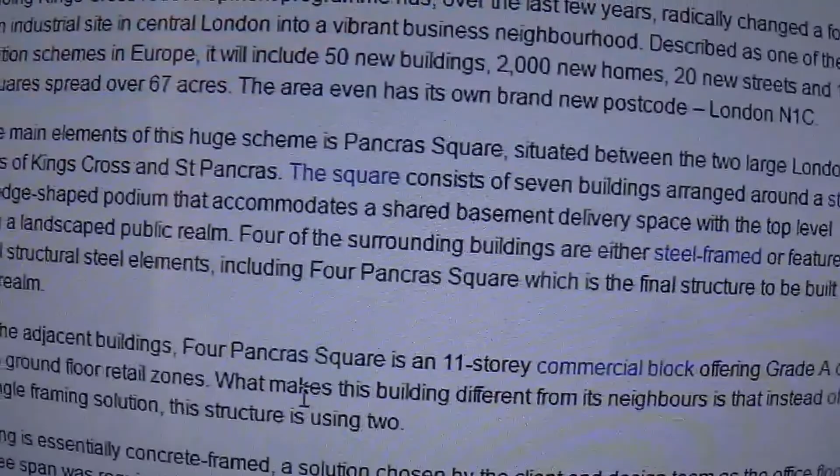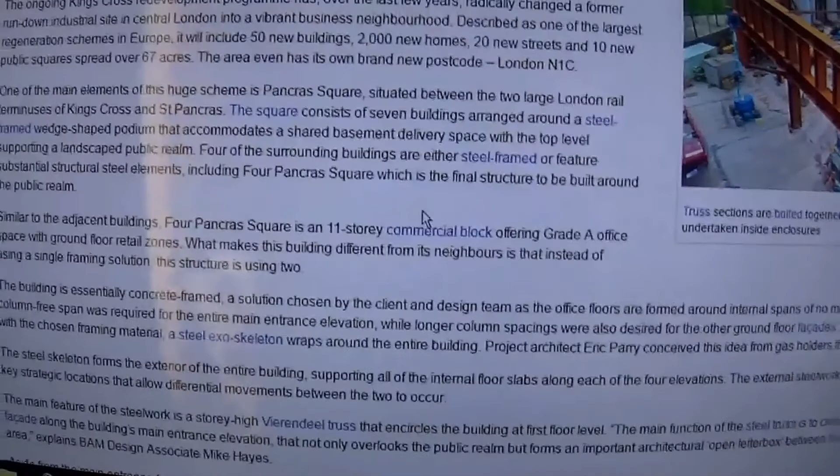It's called weathering steel. And as I suspected, although I think it is still load bearing, it is a load bearing structure, it talks about it being an exoskeleton, which I found really fascinating. Basically it's a special type of steel that's actually designed to have that appearance, that rusty appearance, because they were trying to keep in keeping with... I'm not going to read the whole thing through, it's going to take forever, blah blah blah.

It's really fascinating, really interesting, and I found it so. Some people might think this is so super boring, but I'm sorry folks, I just find this really fascinating. I love learning stuff.

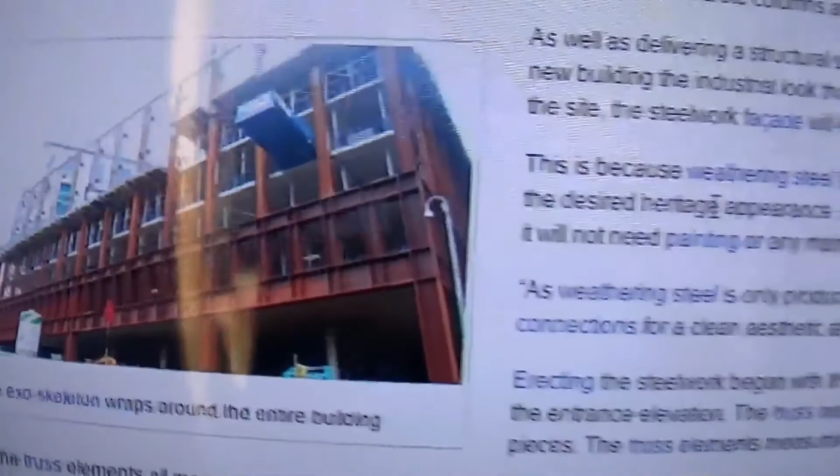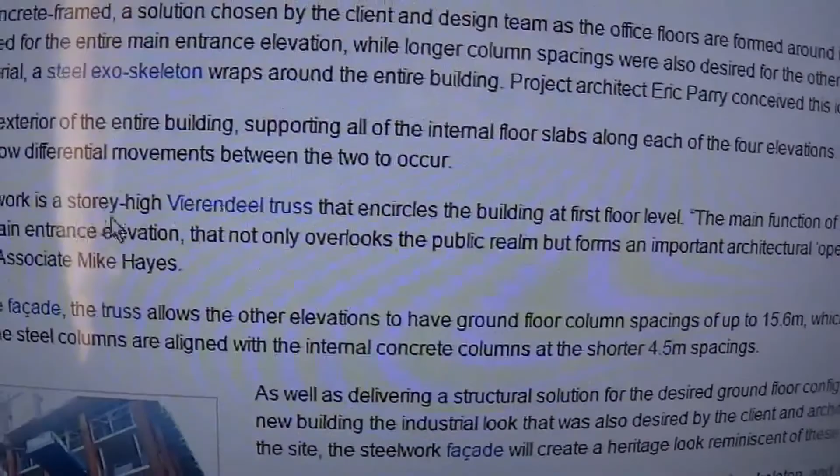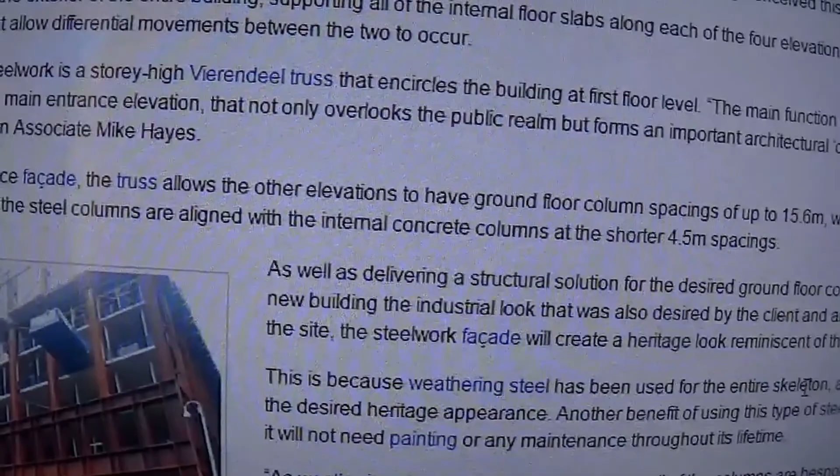Apparently what happens is it's a special type of steel made with certain... hang on, wait, let me find it properly so I'm not talking through my bum. Right, the four surrounding steel buildings are either steel... hang on, let me get to the bit. Right, the main feature of the steelwork is a story-high... what, I can't pronounce that... something truss. Right, hang on, where is it?

As well as delivering a structural solution for the desired ground floor configuration, the steelwork exoskeleton will also give the new building the industrial look also desired by the client and architect. As Victorian era gas holders formerly occupied the site, the steel facade will create a heritage look reminiscent of these times.

This is because weathering steel has been used for the entire skeleton, and its hue will subtly change over time, lending itself to the desired heritage appearance.

Another benefit of using this type of steel is that even though it will remain exposed, it will not need painting or any maintenance throughout its lifetime. As weathering steel is produced in plate, all of the columns are bespoke fabricated sections with hidden internal connections for a clean aesthetic appearance.

I'm trying to find the bit where it explains what kind of steel it actually is. I can't remember, that's probably in the other bit I read. Right, hang on, wait, sorry. Oh man, right, let me... I'll tell you what, we'll just click on that, it's easier, isn't it, and it'll just tell me.

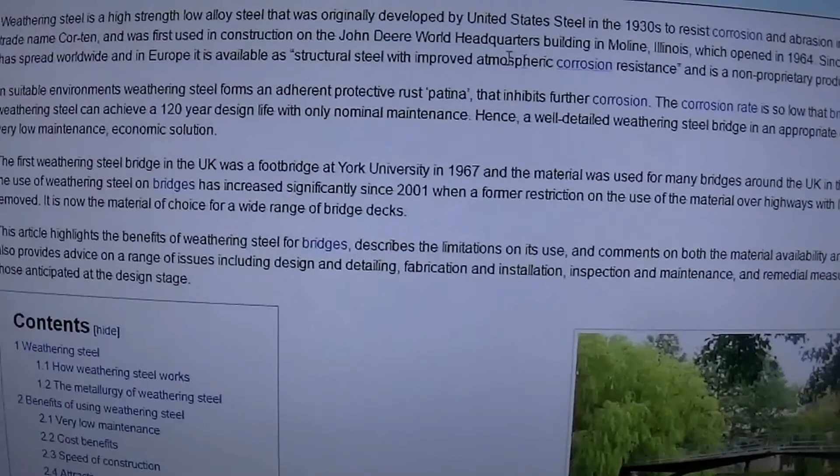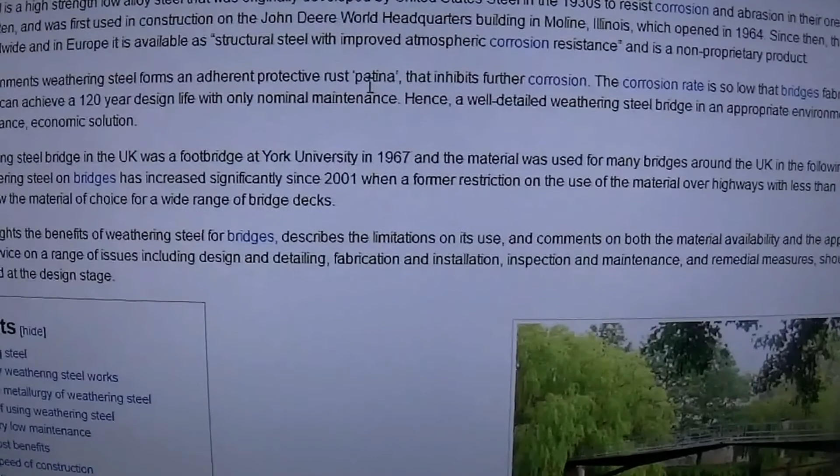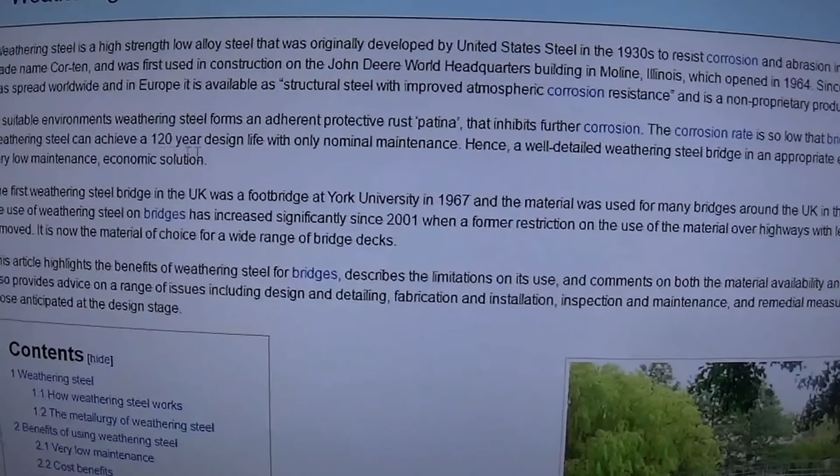In suitable environments, weathering steel forms an adherent protective rust that inhibits further corrosion. The corrosion rate is so low that bridges fabricated from unpainted weathering steel can achieve a 120-year design life with only nominal maintenance. Hence, a well-detailed weathering steel bridge in an appropriate environment provides an attractive, very low maintenance economic solution.

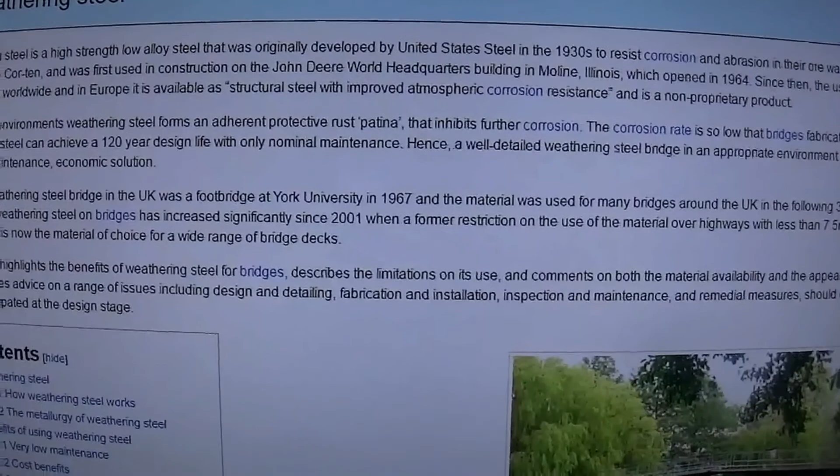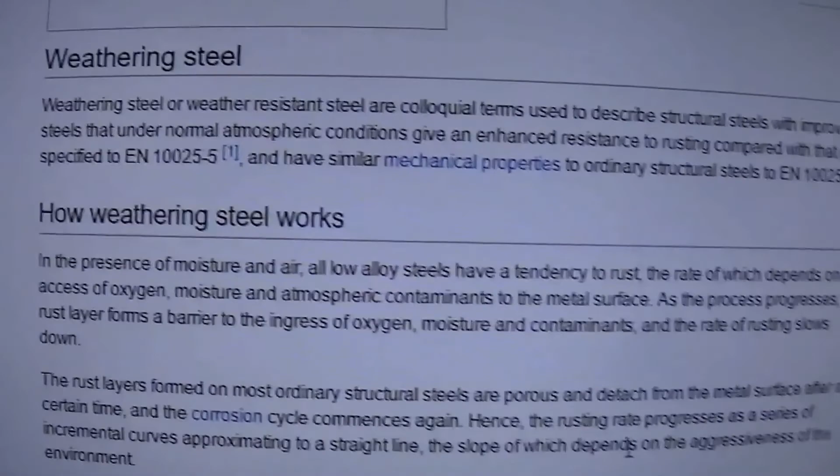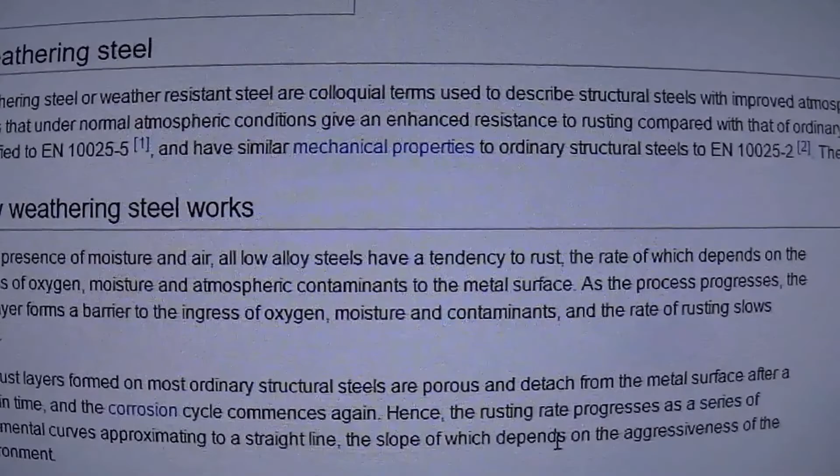So basically, now let me try to find the actual how weathering steel works. In the presence of moisture and air, all low alloy steels have a tendency to rust, the rate of which depends on the access of oxygen, moisture and atmospheric contaminants to the metal surface. As the process progresses, the rust layer forms a barrier to the ingress of oxygen, moisture and contaminants, and the rate of rusting slows down.

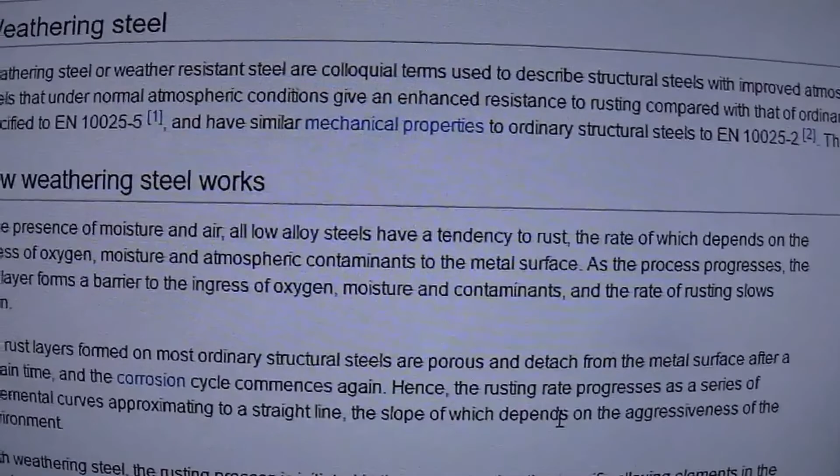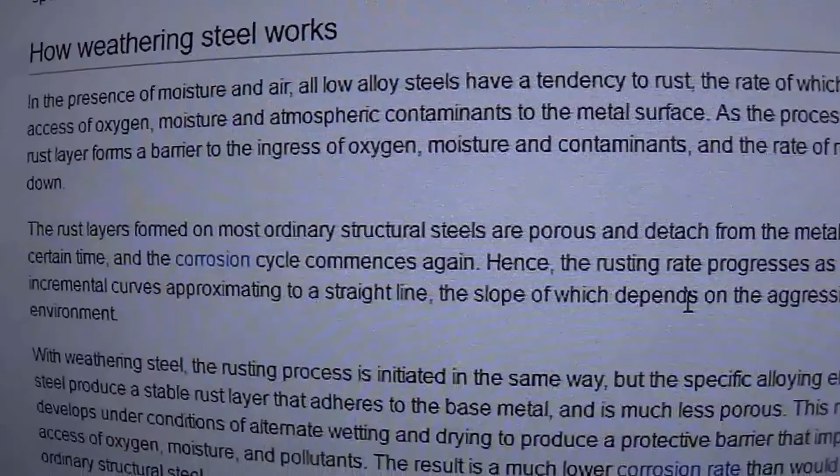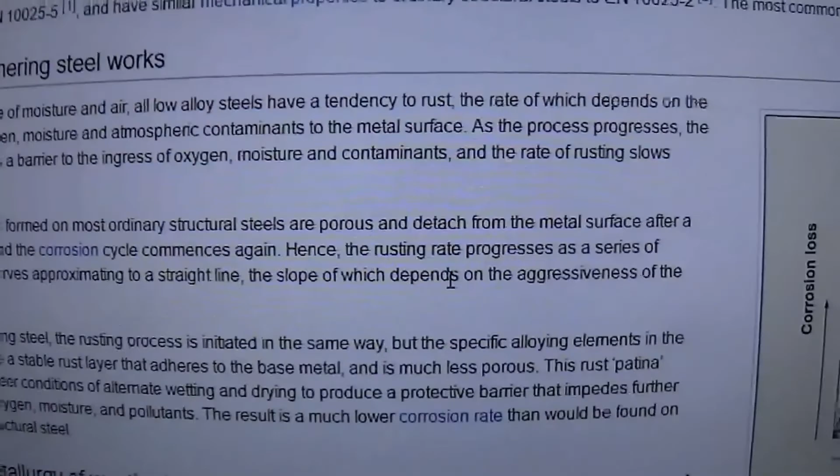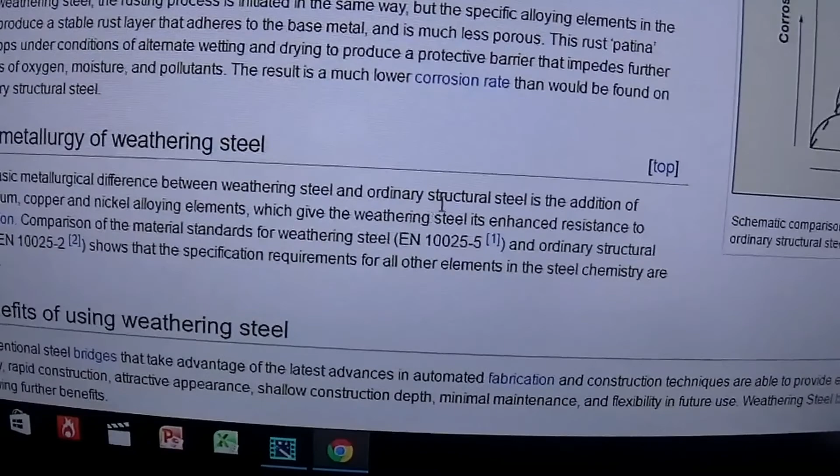The rust layers formed on most ordinary steel structures are porous and detached from the metal surface after a certain time, and the corrosion cycle commences again. Hence the rusting rate progresses as a series of incremental curves. So basically, the basic metallurgical difference between weathering steel and ordinary structural steel is the addition of chromium, copper and nickel alloying elements, which give the weathering steel an enhanced resistance to corrosion.

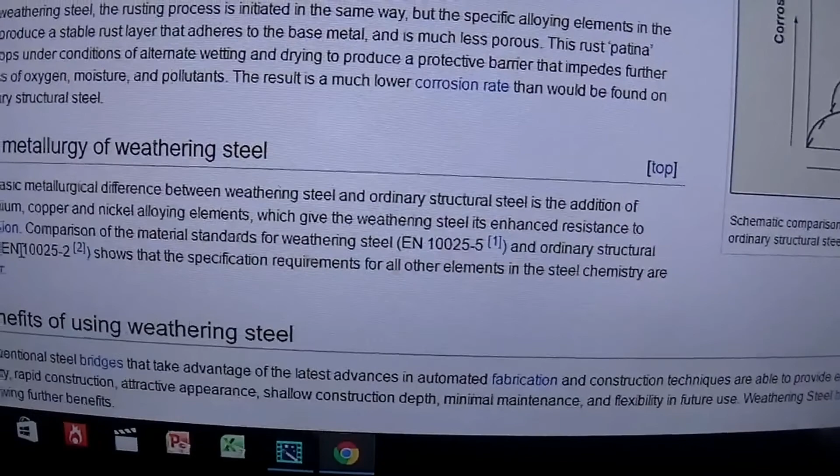Anyway, yeah, I'm sure all of that, for a lot of my viewers, I can imagine - although I could be wrong, of course, because I'm not 100% certain, I don't know everything, or virtually nothing about you guys really. You know everything about me, I don't know a heck of a lot about you guys, all of you who've subscribed. I know some things about some of my subscribers, but not everything, as you can imagine. So my point is I have no idea whether some of you are going to find this absolutely boring, or if some of you are going to find it interesting. I find it interesting, but that's just me, because lots of things in life fascinate me. Life itself fascinates me half the time.

It also depresses me, and angers me, and a plethora of emotions that life can induce from me at times. But overall, generally speaking, I find life fascinating and interesting and curious, and aspects of it, and what have you. So I just find this really fascinating, to be quite honest.

I really think it's interesting that they've created this type of steel that, as it starts to rust, creates a barrier, unlike normal steel, and prevents further rusting. So that's really interesting. Now I've solved the mystery of why they left the building exposed to the elements, which I was saying in the videos that... oh my god, oh no.